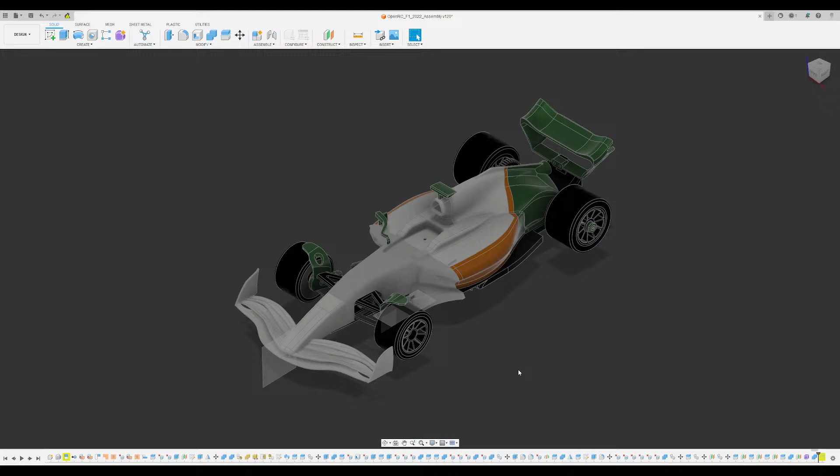But yeah, the main reason I started this channel was for this project, the F1 2022 cars coming out. One weekend in 2020, I was bored and I thought I'd just start this and see how it goes. And that kind of got out of hand really quickly. It's now been 4.5 years later, and I think I've gotten to a point where I'm almost ready for releasing it.

It's not perfect. There's still a lot of things I would have liked to do, but again, my life changed quite a lot since I started this. Back then I was kind of just looking around, seeing what I could do. And now I've got pretty serious commitments. Yeah.

But anyway, let me just go over what the design process looks like. If you watched the videos by any chance, there wasn't a lot there. It was just going through the front wing and wheel design, and you'll notice that the front wing is completely different on this car. So basically every part of this I've had to sit down and rework, and you'll see.

My original concept for this was just keep the core of the car, keep the printed body. It looks good enough, and this motor cover as well, and just print some new aerodynamic parts, new front wing, rear wing, and floor, and new tires. And that was supposed to be it. But the more I got into it, the more my obsession for everything being right took over.

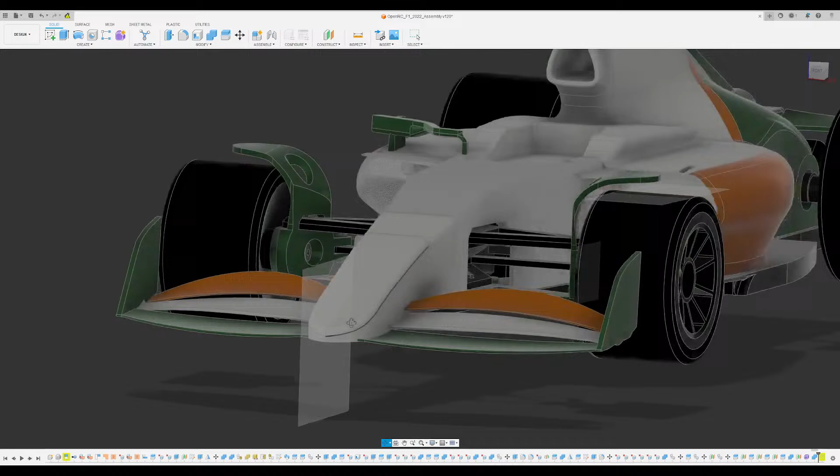This is also a full redesign of the front wing, basically from completely new elements. Made it much more simple, much more accurate to the real thing, where the wing starts from the root, goes up, and then merges with the tip, with the end plates. The bottom part's also a little curved, so I wanted to get some amount of the aerodynamics right.

So that was the original concept, and then I thought, if I had to make a wider wing anyway, I made something based on the RB19 with more realistic elements. The end plates lack a bit of detail, but that's mostly just for printability. You'll also notice that they look kind of thick in the design, but in reality they're really, really thin. Even now, it's just barely doable. I might even thicken those up a bit more before release.

My traditional method of strengthening prints like this is to have fillets, but this design has gotten so complicated that it's impossible to fillet these without some error popping up. So yeah, just Autodesk Fusion doing Autodesk Fusion things, but also kind of my bad for going too aggressively with the design. There were a couple of mistakes.

That's another thing. So you'll notice that this is an assembly. Basically, the idea was to modify the open source OpenRC F1 assembly that Daniel Noree had uploaded on his website. I thought that would be an easier method of getting all the dimensions right and not having to worry about designing parts separately and then struggling with the dimensions. But in hindsight, I would not do this. I would actually just build up separate parts, put them together in an assembly and fix the dimensions in the separate parts, because it avoids a lot of complexity with everything being in one file. It just sort of breaks Fusion a bit.

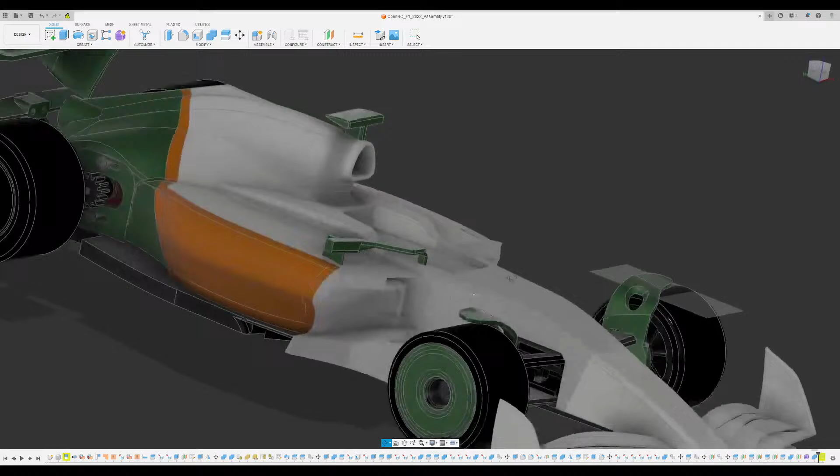And you'll notice also that the front is all a mesh, because it's all these triangles. I had to convert it to a mesh because when I was working on it, I had to split it up. And that's something I'll come to. But basically, I couldn't put it back together. The combine just refused to work. So in the end, I just turned it into a mesh and then combined it, and it somehow worked. It prints fine. You'll notice there's a lot of little jagged details. Those don't really show up in the prints, as far as I can tell.

So front wing full redesign. The tires also got a bit of a redesign. It's mostly cosmetic, but the covered wheels, I made them solid because it seemed like a lighter design than actually printing spokes. The spokes are stronger, but they're much heavier, and I don't think it's really necessary. Although I haven't really tested any of this. That's another thing I wanted to do: get actual electronics, build up a working car and test it. But my experience with LiPo batteries has scared the shit out of me, to put it mildly. So I won't be doing that again in a hurry.

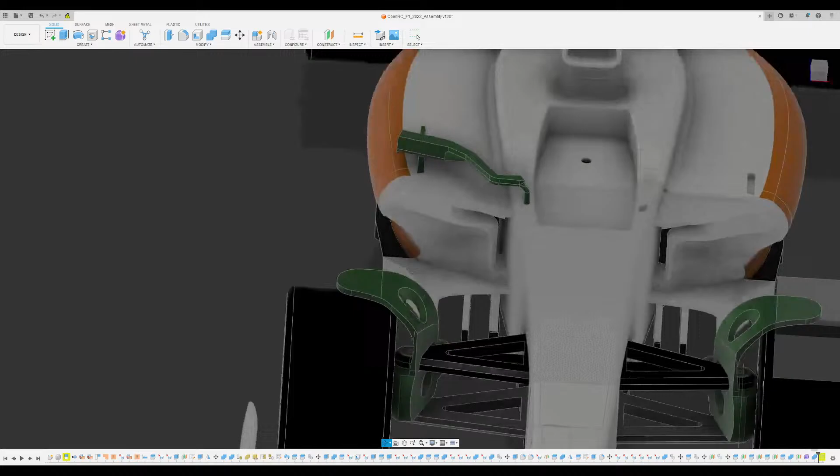So you'll notice these wheel covers. I did design these and I thought they were pretty good, but on comparison, they're not that great. They're a very poor replica. So I'm thinking of redesigning these whenever I get some time. Actually, I was planning to do it now, but I'm not so sure anymore. Just getting the live stream up took me a bit of time.

Also, the front was redesigned. The floor is fully redesigned. The front tray fits in a somewhat different way to the original, and you can see I've tried to replicate the aerodynamics as close as I can while keeping the original M3 bolts in the same spots, or as close as possible. The suspension and chassis are more or less the same, same drivetrain. The idea was to keep the electronics the same, so if anyone's got the existing one, they can switch over without having to buy any expensive new ESCs or motors. And I've kept the side pods the same.

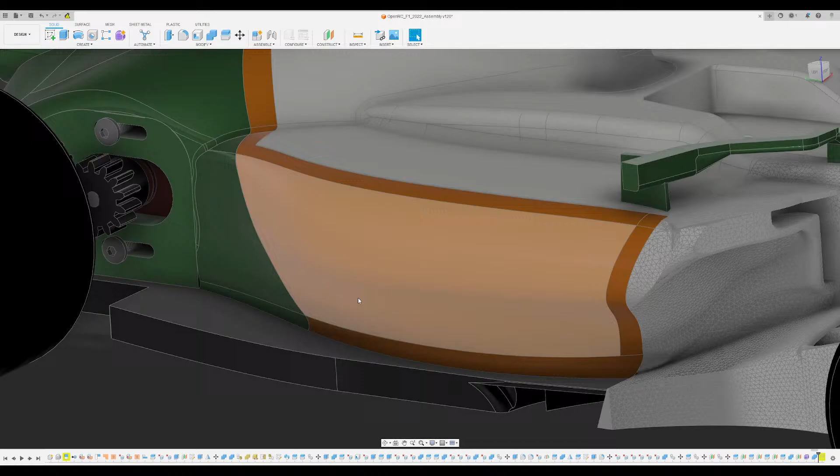This is not for lack of effort. I tried very hard to create a more representative side pod for the new 2022 regulations, back when I started, and you can tell that failed dismally. I really wanted to do a Ferrari style side pod from the 2022 car, with the bathtub style things, but that didn't really pan out. So I'll probably release it with these, but I have been working on an alternate concept with more of an undercut after seeing the 2024 cars.

So this is undercut, a small amount of downwash. The hope was you'd combine the two airflows and push them in. But really, with all the spinning gears, the rear corner is pretty fucked no matter what you do aerodynamically at the front. This is more of a cosmetic job. The aerodynamics are functional, but at the end of the day, it's not really going to matter too much, I think.

Yeah, so for the new ones, I also have to redesign the front. I haven't really thought of tackling that yet. That's if I have time. I have the enthusiasm, but I do not have any energy left for this by the time I'm done with work and sort of my other stuff, life stuff.

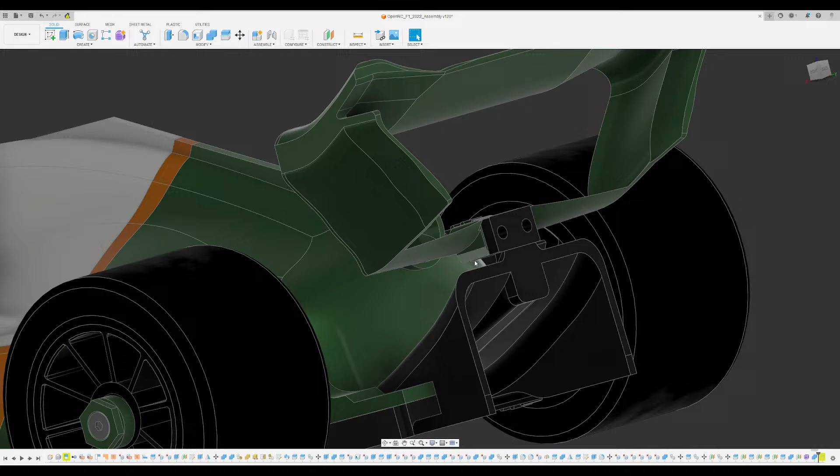And yeah, floor, I think I went over it. Diffuser, everything is kind of built. The rear wing, this is also kind of a bit of a project, really. So I went through a couple of iterations. This is, I think, the fourth iteration of the rear wing as a base concept. So it's getting it to sort of fit correctly. I had made a mistake where it was actually behind the diffuser at one point, and then I looked at the cars a little closer and realized they should actually be ahead.

So yeah, did that. Got that working, and this is based on a wing that Mercedes had brought to Monza in 2022, I believe. So it's a low drag one. The thinking was that for this car, at the speed it's going to be running at, drag is going to be much more of a problem than downforce. So I can trade off some downforce if it reduces drag.

And I also tried including the split end plates from most 2024 cars. So yeah, I've been trying to implement things as I see them in F1, but it's just very limited by time. Yeah, I think that's pretty much whatever I've done. So yeah, anyway, I want to try and wrap this up soon. It's been sitting on my mind for a long time.

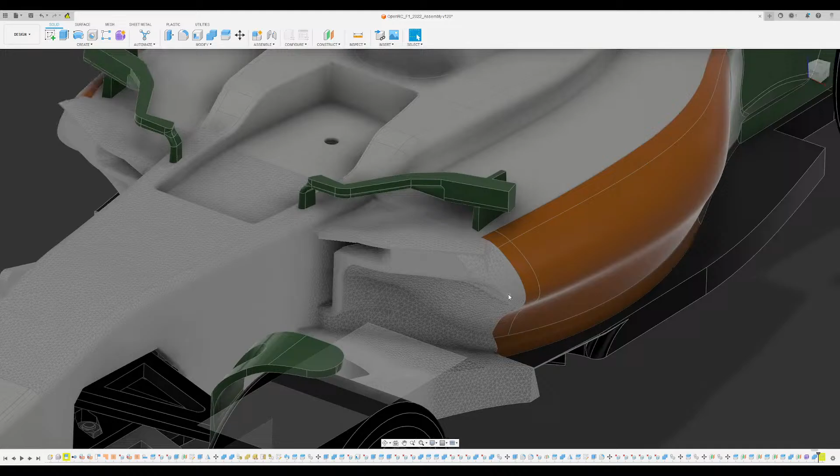Oh, also, new mirrors. So one of the problems I faced with the new floor was that the way the sidepod lid of the car attaches to the floor is gone. Basically, that used to be like a barge board type of thing, and now that barge board is replaced. So instead, I figured a cheap and easy way to get around that is to just make the mirrors. The original ones had the mirrors here and then the attachment points here, but instead I just combined the two.

It's a nice idea on paper, but I think in reality it's a bit more complicated. Just getting these parts to print is a bit tricky. Yeah, I mean, this project really isn't perfect, but I just want to get this done with, to be honest, at this point. I figured that at least releasing something is better than nothing. And yeah, I'll see how much time I have left for refinement.

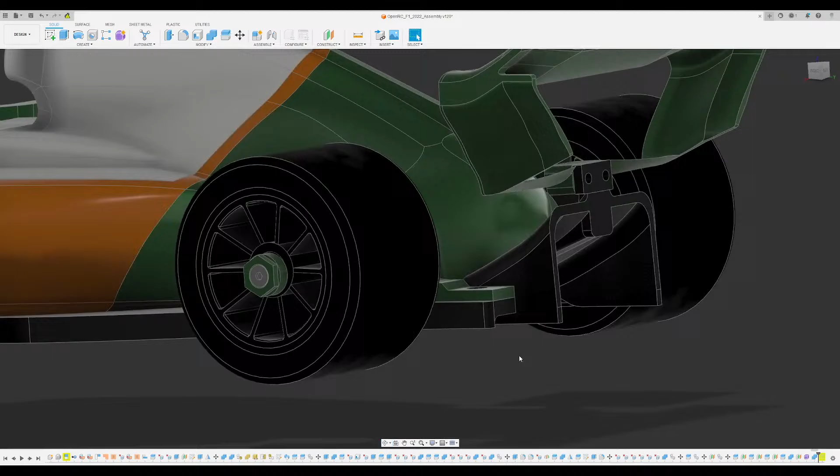And yeah, so that's basically it. The motor cover is also subtly different. You can see it with the diffuser. The diffuser kick comes up right behind the motor, so unfortunately the motor cover needs a cutout. That's something I'm thinking of maybe redesigning, but at this point, I don't know. It's probably just enough. So that's sort of the thought process that kicked off the design of the new sidepods.

The motor cover is going to be replaced anyway, so why not just go all in and redesign it fully to better match the regulations. But again, time's a real constraint. Yeah. Other than that, it's fine. I've printed it. I've done some test fits. Of course, I haven't done any running tests because I don't want to fuck around with LiPo batteries.

But I don't know if I'm allowed to swear that much on stream, but whatever. Yeah.

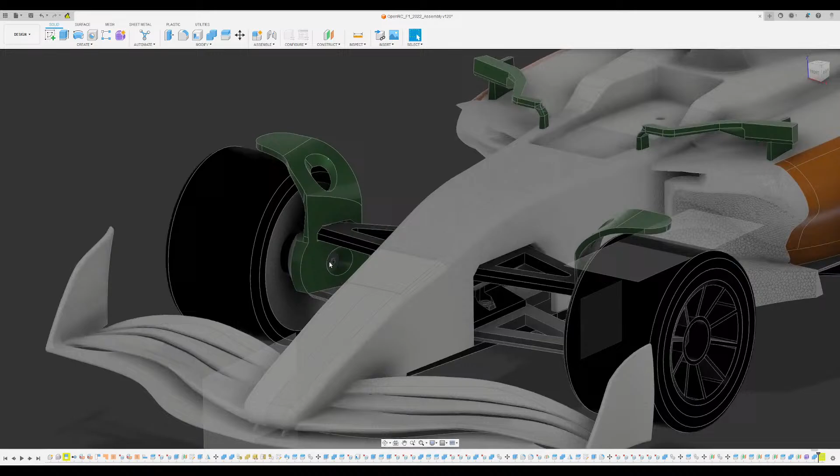Everything fits. So let's see. I'm gonna try and work out how do I build this. So really the last part left, I guess, is the wheel brows. So let's do that. Right, left. I had started work on it somewhere. I need to just find it. Oh yeah. 7 to 8. Yeah.

So I started work on a more full wheel brow, deflecting it off to the side like the actual car. The idea here is to split it into two parts and have this screw be the common mounting point for both. Yeah. So if I remove wheel brows and look at this part in isolation,

so yeah. Anyway, I'm gonna try and figure out how to do this design. I'm probably gonna be live until 12 p.m., so about 40 minutes or so. So I'm gonna try and do this.

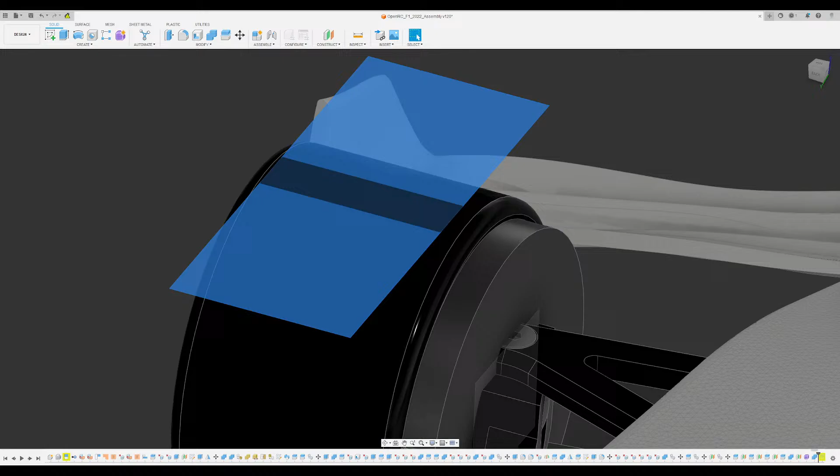All right. So first things first, let's construct this bit, the part that's supposed to go over the wheel. Let me look at some reference images. Okay, so this is the standard part, so it should be fairly easy to replicate. Let's see. I'm gonna give it about, let's see, how about 1 centimeter? I think that's gonna be way too much, but

front. Yeah, that's way too much. 2 millimeters. It's cutting it close. Any sort of movement might scrape against it. 3 millimeters seems about right.

So let's do, right, hold on. Inspect this, 5.6 centimeters. Okay, 2.6 now, 2.63. So yeah, is that really the midpoint? Doesn't look like it. Oh well, gonna do about 1 centimeter, seems about right. So what I'm gonna do is do 160, so about a 20-degree sweep,

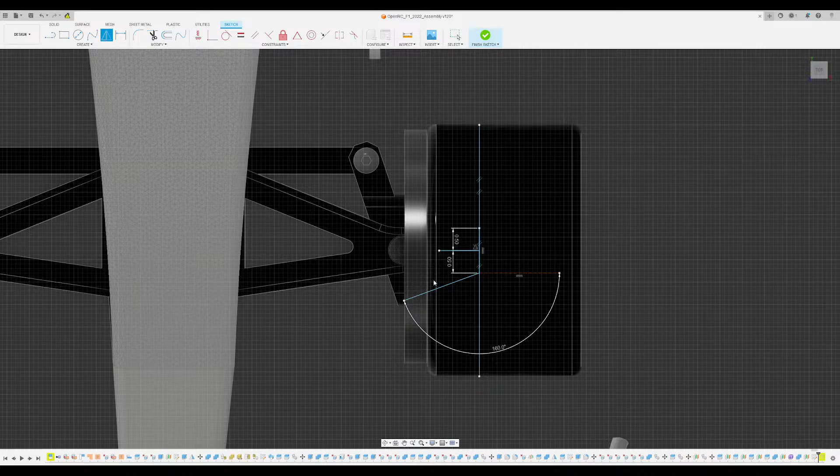this looks okay. Let's try extruding and see how it looks. 2 millimeters. It's a bit high. I mean, if I were to do this realistically, oh, hold on. Oh, yeah, I think Fusion's just trying to compute whether it's colliding or not. It's slowing down a bit.

Yeah, realistically, if I were to do this, this is I think too close, because any bumps will cause the wheel to scrape against it. That's not ideal. So instead, let me start as an offset. Minus, not where it's supposed to go, so minus point.

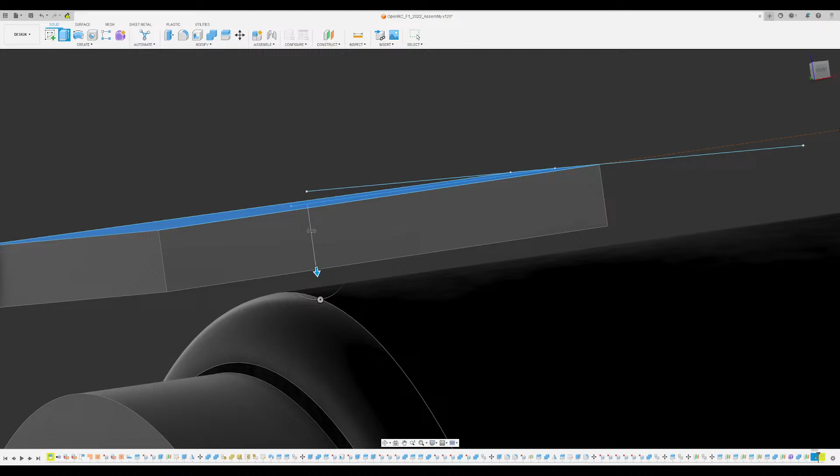I can't really see the extrude windows, I think. Yeah, you can't see it on the stream. That's unfortunate, because I liked it to be there. So 0.1, distance of 0.2. So that should be okay. Yeah, that kind of looks fine.

Now, split body. Actually, hold on. I don't need to split the body. I just need to split this face. So I want to create a connection between that part and the circular part below. So hide this wheel. Yeah. So now this is the splitting tool. Extend it. All right. And now, actually, hold on. Extrude this.

And with a taper angle, let's say 5 degrees. Tapers in 3 dimensions, though, that's not ideal. That's okay, I can just cut it anyway. Let's try 10. I want to basically get to a point where it looks about right. 15.

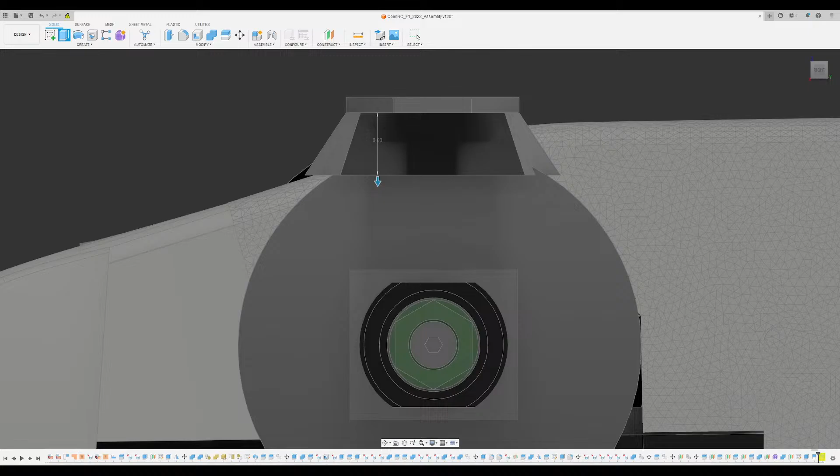My Fusion minimized again. GG's. Right. So this part, I think. What if I just delete this face? Just deletes the whole thing. Okay, cool. Thank you, Fusion. Very cool. So let's do another split face. Split this face. This, extend it. Okay, that should split the face. Extrude this all the way back. Yeah, so that's a decent cut.

By the way, if this looks chunky, I'm gonna clean this up. I'm gonna do fillets and stuff, so don't worry about it too much. So extrude all the way up here. Yeah, so that should be one clean surface, hopefully. Of course, it's two because Fusion. Anyway, that leaves us with this, so we can extrude this down.

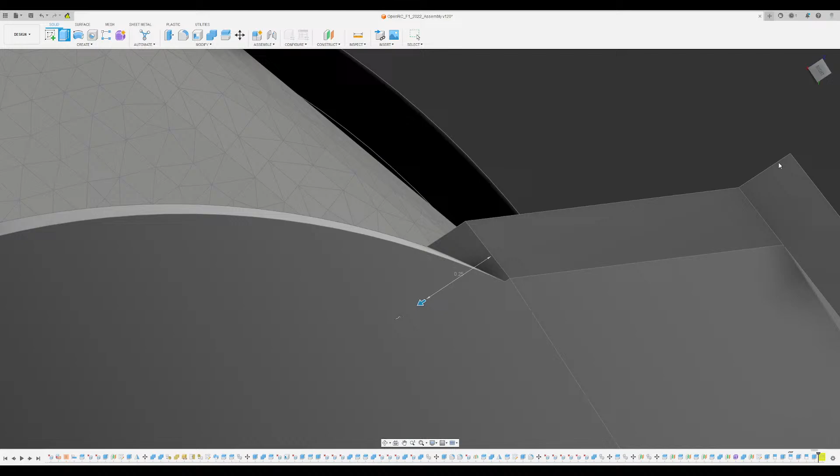So, odd. There's a 25-degree diagram. 25 might be too much. Oh, that's weird. Well, it does seem to match. What happens if I make it 0 again? So yeah, it goes straight down. Okay, interesting. So I need to give it the same taper as the original extrusion, but okay, whatever.

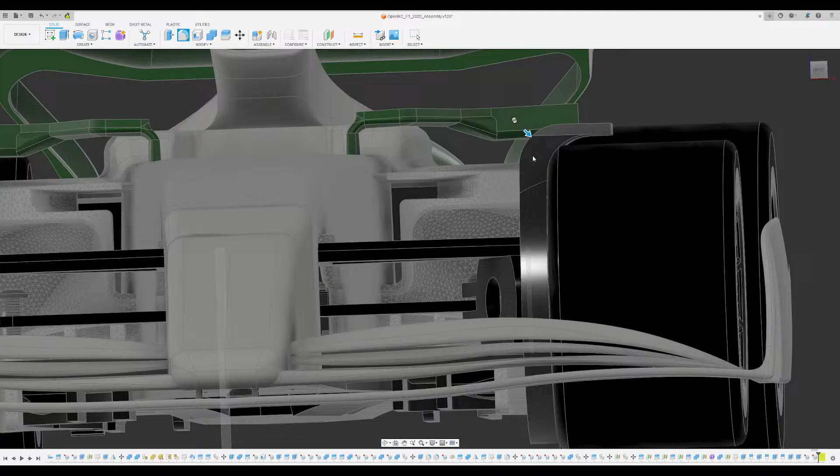So this should be a bit easier. All I have to do is hit delete. Yeah, there it goes. Hit delete. There that goes. Yeah, it's a cleaner join. It's not perfect. I don't like it. Oh well, we move. So let's fillet both of these. I think that looks good. Let's get the slick and see how it looks. Ooh, that's very chunky. And so hold on.

So let's fillet this first. So this shouldn't need nearly as much of a fillet. Get in here. All right. Okay, so this can do with the small end. Okay, so then Control C, Control C. So the first thing is fillet this to 0.4. Should be good. Then we fillet this. Filet mignon. Right. Awesome. So that should be good.

Then we can fillet these edges as well. Actually, I can just fillet this whole rectangle, I think. Nah, that's not gonna work. So let's do this instead. Okay, that looks decent. Alright. Comparing that to the original, yeah, it's already looking a lot better.

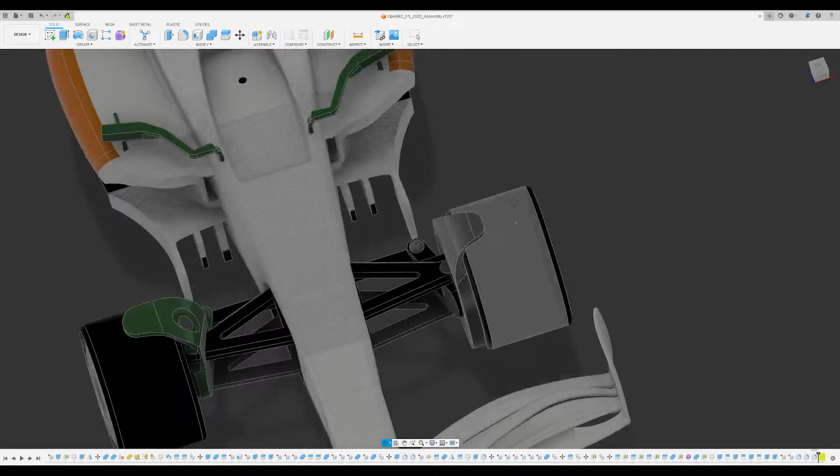Okay, so now I need, oh, actually, before I do any of the fillets, I should probably Control C these fillets. I just realized that the clearance between this face and the wheel is a bit too small. So that might be what's causing the issues, come to think of it. Oh, I had extrude instead of fillet. Fillet instead of extrude, my mistake.

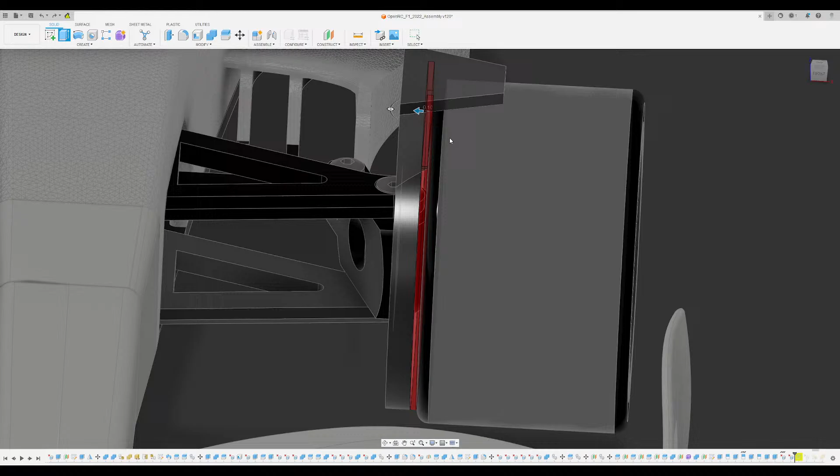Oop. Okay, my Fusion just all tapped out for some reason. It's been doing that a bit. Okay, let's delete that. And of course it causes an error. How about this? So yeah, that's another thing with this project. It's a bit of roulette. You don't really know which faces will get deleted and which won't. But face deletion is the cleanest way of getting rid of these weird artifacts.

Yeah. And okay, so now let's try filleting this. How close can we go? I still want to do 0.4. I think the tire is filleted to 0.3, so let's keep it at 0.3. Fillet this.

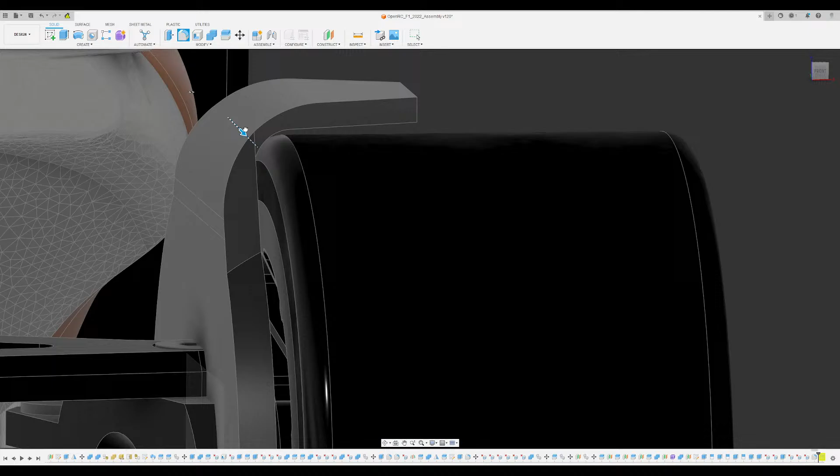0.7. Oh, another thing to remember, this is more of a self note, is that even though it looks thick in the design, the actual printed part is going to be super, super thin because we're zooming in that much. So I'm gonna keep that because otherwise it's gonna be flimsy as hell when I print it. And that might be too much. That seems about right. So yeah, that seems okay. Let me just check once with the reference images. This may be a touch too big. No, it should be fine.

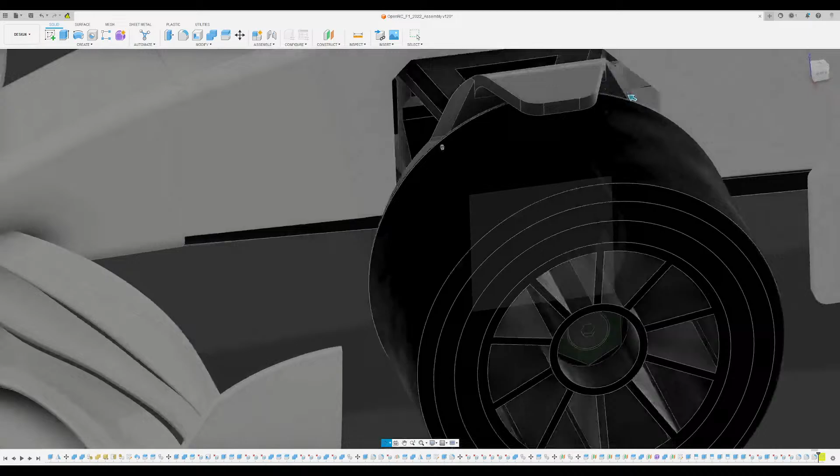Okay, now I need to fix these edges. They're a bit too sharp. So the best way I can think of is filleting them out. So yeah, that should fix some of the smoothness issues. Bingo. Now, these edges. Yeah, that seems about right. Bingo, bango, bongo. Let's go. Yeah. Perfect. So now we've got a decent top face. It's time to work on the bottom.

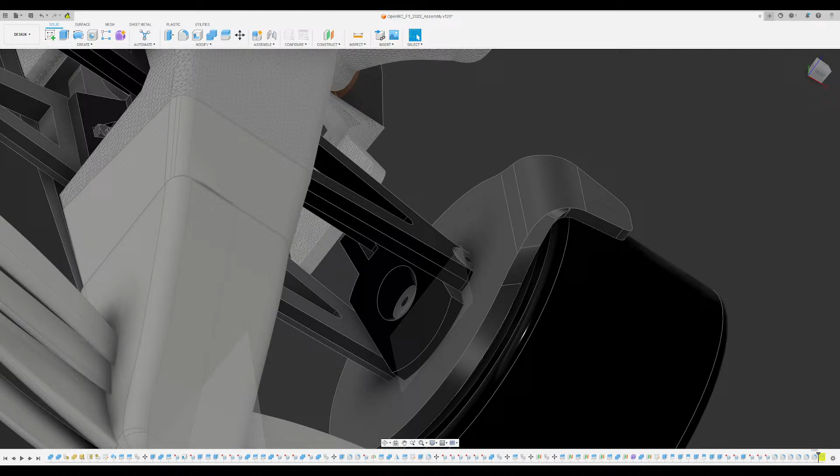Oh, there it is. Okay, so it's mostly circular, but at the bottom, it's got this sort of vane. Can I model that? I think I can model that. The question is, does the fairing continue? I don't think the fairing continues past that though. So let's, actually hold on. I need to block out most of the body. So let's get the front nose, front wing, and the chassis assembly out of the way.

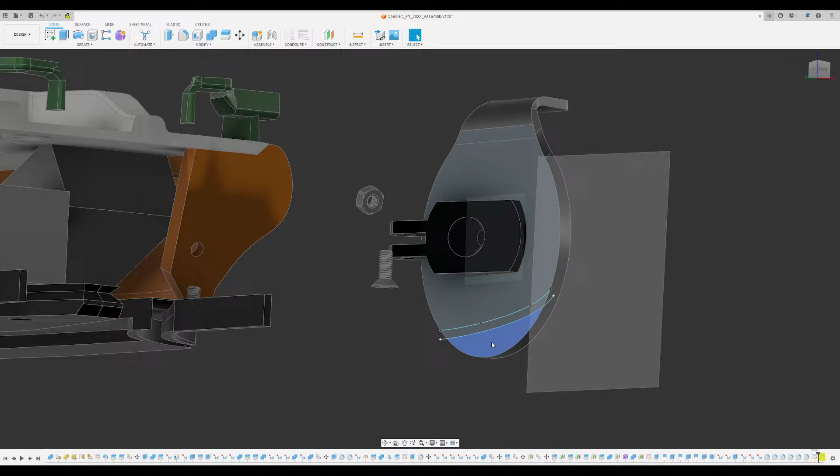Let's create a sketch. So anything else on the way? Oh yeah, the front. It's like front trim cover and the front tray. This out. Create a fit point spline. Finish that. Offset this -0.2. -0.2. There we go. So that should give you a nice isolated area. All right. So now extrude this. Does that look about right? Okay, I think we're gonna need another sketch in a perpendicular plane. So let's get a

You won. Sorry, cat got in the way. What? Okay, I'm gonna take a minute. Bye. Be right back.

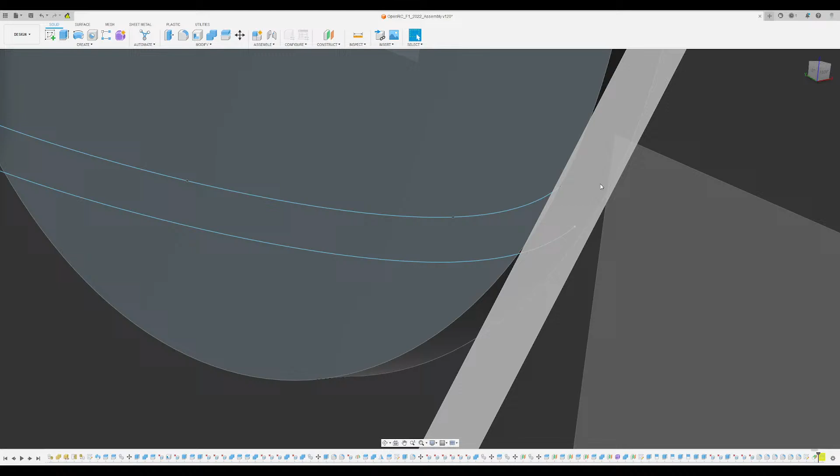So now let's create the second dimension.

Now from here... what? I'm giving you scratches, dude. I'm sacrificing a hand on the stream for this. Why are you giving me looks? Okay, so that should be good.

Let's copy and make this a bit nicer. Sketch, and now let's create a sweep. Point being, select the spot. Ooh, what the hell, that causes some interesting errors.

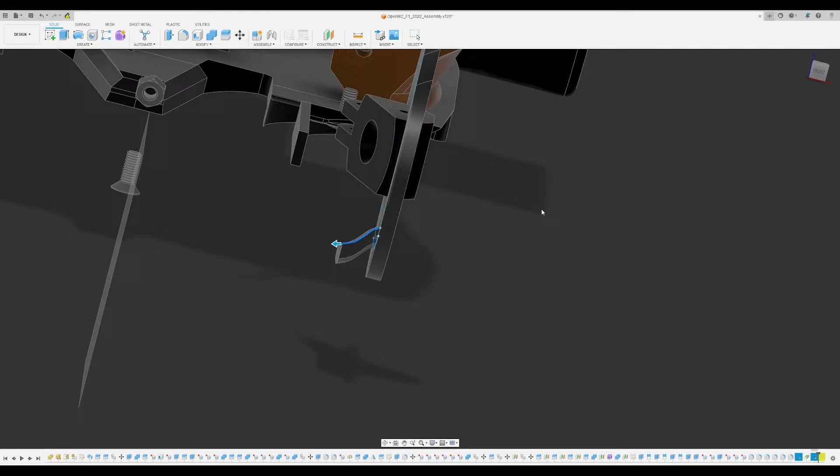Body, how about join? Why do you intersect itself? How about... there we go. Something, what's up with that. So yeah, that's decent, I think. Okay, now got that.

I can delete this, I think. Yeah, look at that. Unfortunately it's in 2 dimensions, so there's no one spot I can print, I have to put this together. As a compromise I can probably just cut this at the bottom and make the bottom one part and the top the rest of it. Okay let's do that actually.

Split this. The splitting tool is going to be 1. So for now I'm gonna split both. I'm gonna figure out exactly how I'm gonna do this in a bit, but yeah.

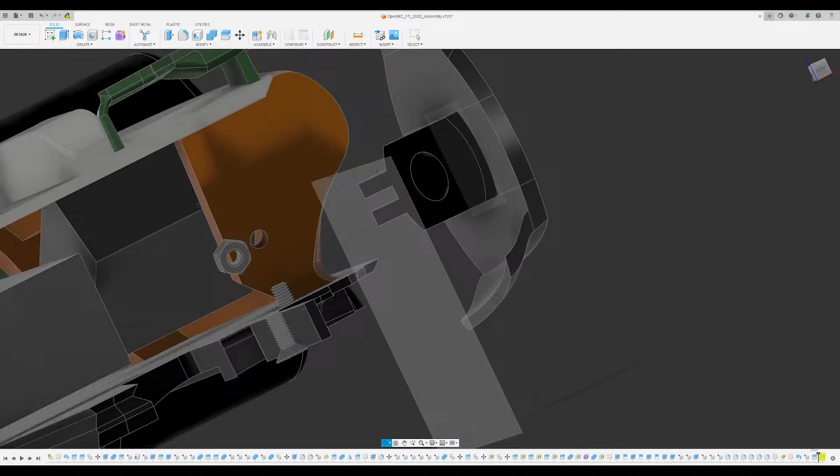Let's see, something seems off here. Let's try a press pull. Can I pull this face forward? That... what if I let's do automatic.

Okay, that looks a damn bit better. So let's compare that to the old wheelbrow. That's a massive improvement.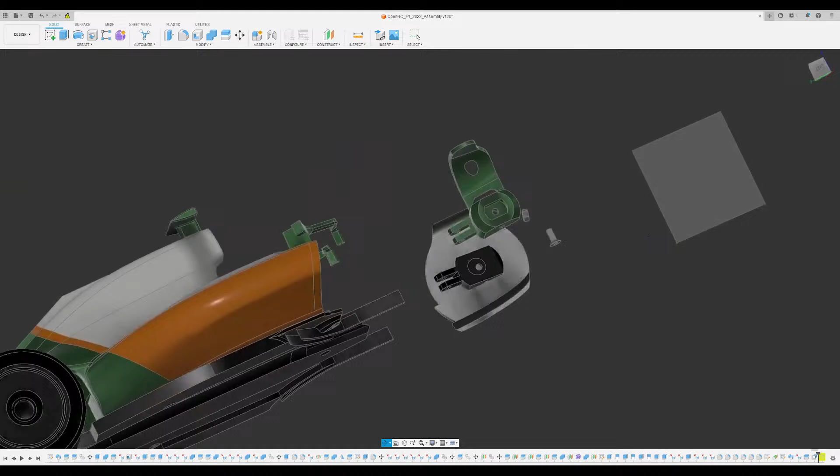Oh, I think something is up with the rotation. Okay, dude, chill.

So that might be a problem, it's kind of cutting through. Yeah, I should probably, actually yeah, let's do that.

Tool body is this, let's keep the tool, cut it. That should result in a new body popping up here sometime soon. Actually, maybe even a couple of new bodies popping up. And oh yeah, Fusion of course minimizes on me. GG's.

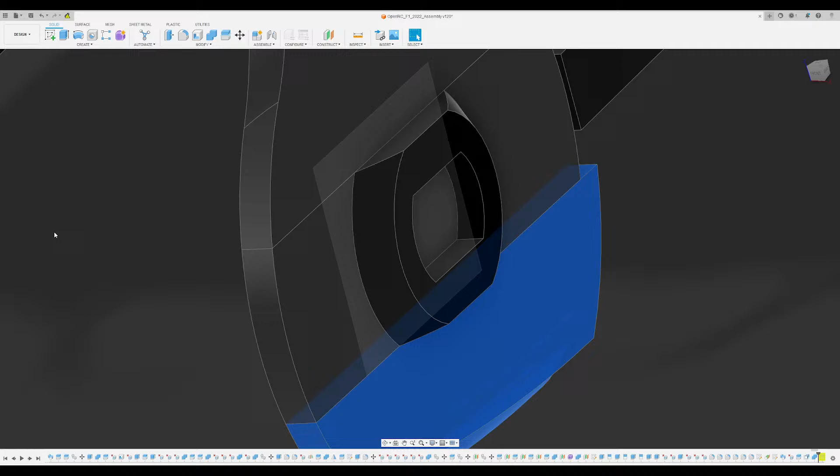Combine 3, 5, and 6. Yeah, 4, 5, and 6, and 4. So that should be pretty easy. Print the... I don't like making it a 2-part, but what the hell, it's a pretty complex bit of part anyway.

What else was I thinking? So will this fit? Good question. Let's move 7 to 7, see how this works. Yeah, so this will sort of slot in.

When I print this I'm thinking, how will this sit on the actual suspension part? There's actually like it's a bit of a press fit, that's not going to be ideal. So let's press pull these back a bit.

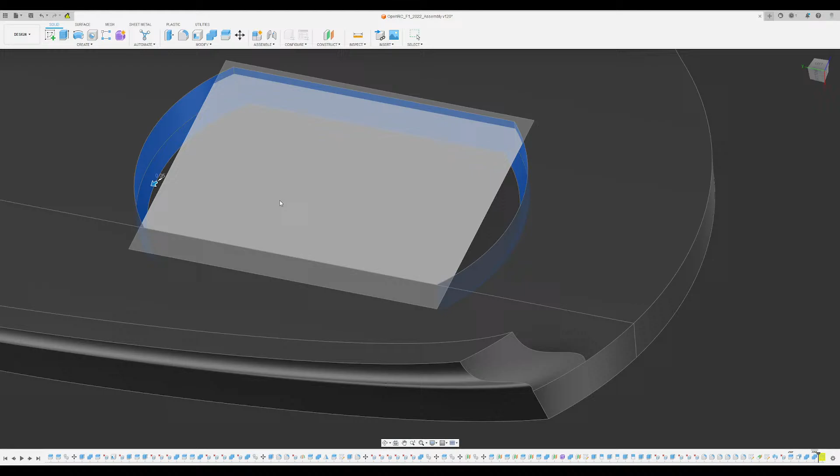Yeah, so give it a little, that's half a millimeter. Let's get 0.025, not too much, but just enough so that it, printer clear, accounting for printer clearances and all that. Anyway...

Oh god, the rotation on this kills me every time. Actually, I need to do that. Let's get 7 to 7 back in. This, got, keep, okay, bingo bingo. Let's remove 7 to 7. Did that affect it in any way? I don't think it did.

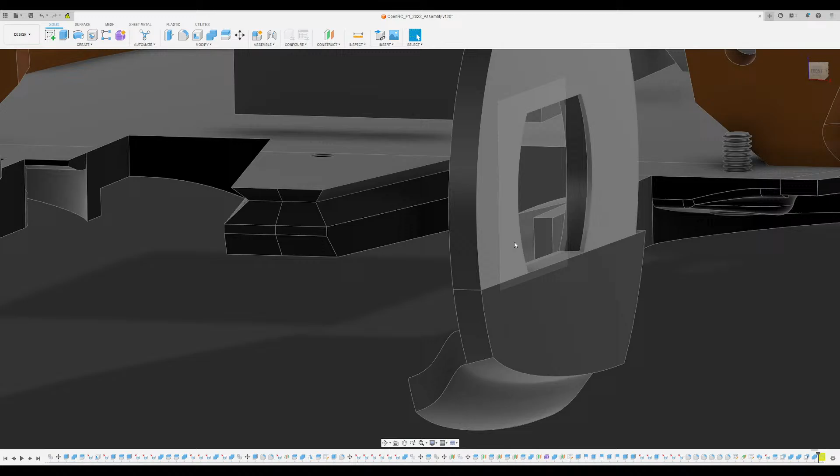Yeah, most of the attachment is going to be to the upper brow, so the lower brow has like 1 point of attachment. That's suboptimal. Can I do a dovetail and just slot these two together? Would that work? So the primary axis is going to be vertical, so I can probably do a dovetail joint.

To 120, based on absolutely nothing at all. 0.6 seems okay, so this should be 60 then.

Yeah, so inspect 1, yeah, they're exactly the same length. And let's create a mirror line.

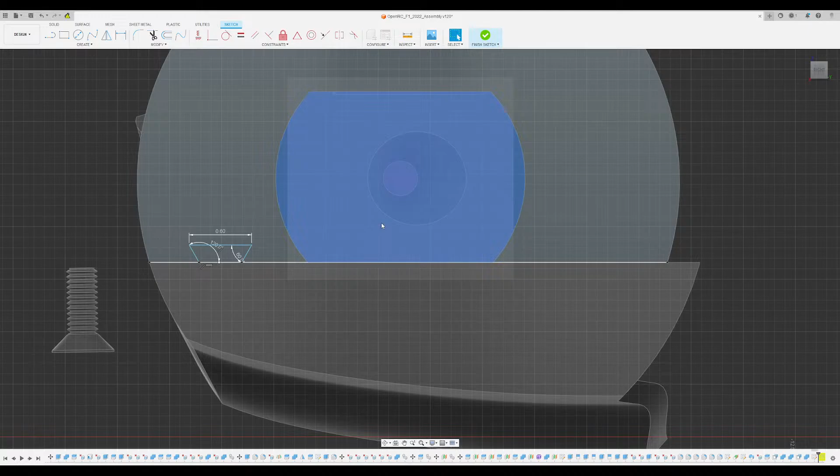So this is the midpoint. Hold on, that shouldn't be the mirror line. The mirror line should be, no... and line, because it's for the whole wheelbrow. I think that's the correct mirror. I sure hope it is. Anyway...

Yeah, that should be good, we have 2 dovetail joints. So basically, when gravity pulls it down, sort of the dovetail joint resists the whole thing.

Control and click with one hand is an interesting experience. Shoot, and back here, so create a new body, and you'll see why in a moment. Now combine 1, 2, and 3, and then combine 1, 2, and 3, and join them. Don't keep the tools. Perfect, so that should be 1 point of attachment.

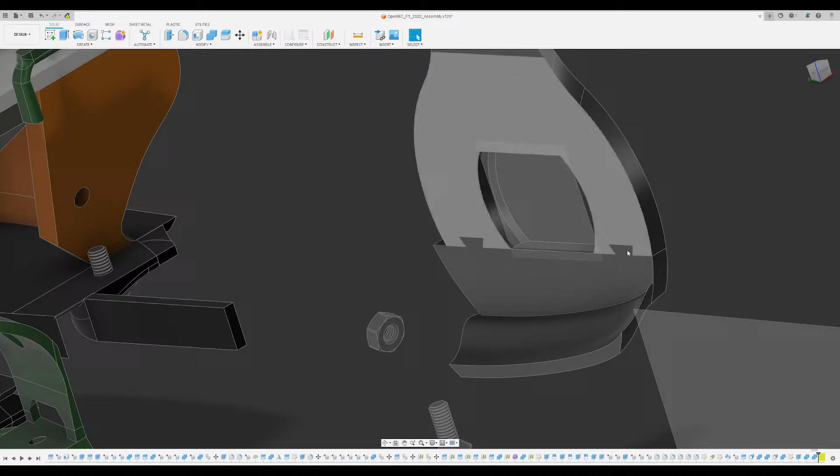If that doesn't work, sorry, so if that doesn't work, I'm gonna add an additional screw slot at the bottom just so this sits in perfectly. Actually, I might do it anyway, because fuck it, why not. It's good to have a little bit of redundancy, I think.

And the original design does, on that note, yeah, the original design does require it, because, so combine this with this, cut, keep tools, done.

Combine this. This doesn't really intersect with the lower wishbone, so it should be fine. So now when we hide the chassis assembly and look at this in isolation, I can delete this, can delete this. Hope that doesn't break anything.

Like Kerbal Space Program has a Kraken, and Space Engineers has Clang, I think Fusion 360 should have a similar god of physics that you pray to every time you delete a face. Like, praise the gods. Make sure this fucking works.

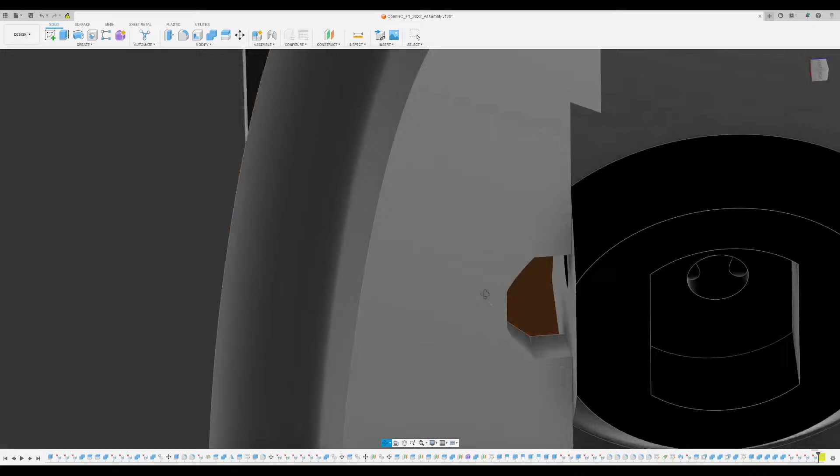What the fuck? Genuinely, this is completely bugged out now. Okay, let's try deleting these faces. Maybe that's what's causing the issue. So 1, 2, 3, 4, and a 5. Huh? It's still giving the same thing.

All right, so 0.025 is sort of the consensus, right? 0.475, let's keep it consistent. Okay, so now when I get the chassis assembly in, it should be smaller. No, it's actually worse. Hold on.

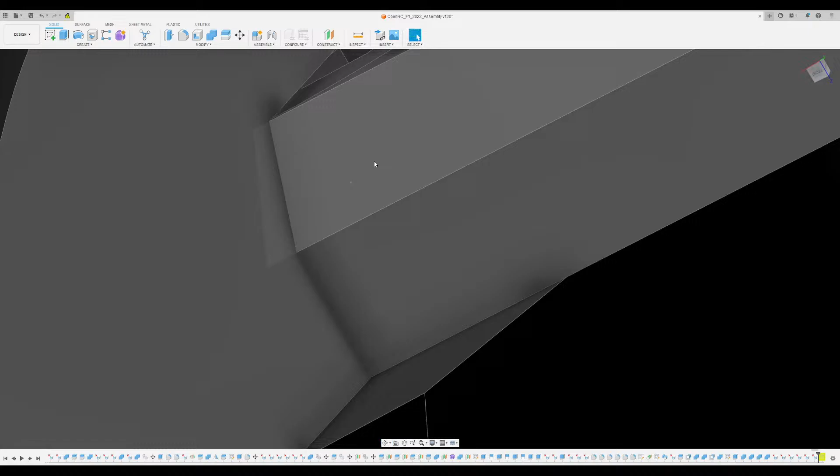How did the assembly fit earlier? It's just supposed to make a cut, and it really hasn't. Only just fitting now.

Okay, maybe I do need to account for that a little more. What? What?

Okay, let's do this again, I think. Yeah, hold on, I think I need to take another little break for a minute. This guy's acting weird.

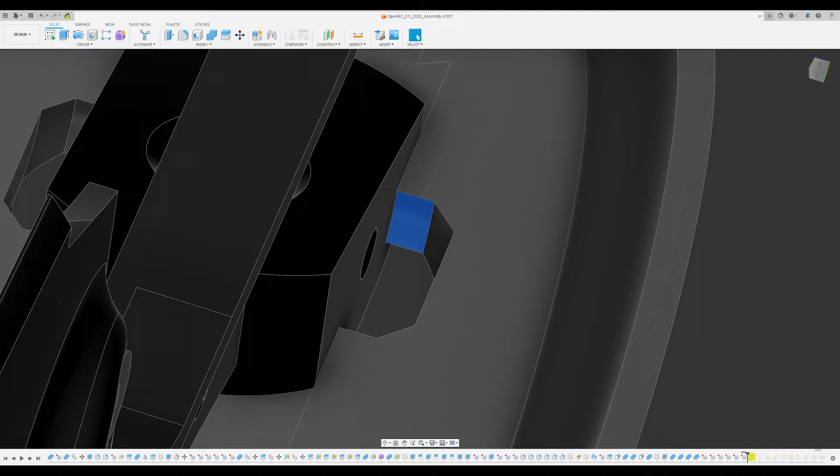All right, where was I? Click, click, click.

Press pull. Okay, 0.525. Okay, so 0.45. Let's try this and bring back the chassis assembly.

That's really confusing. Just cut, right?

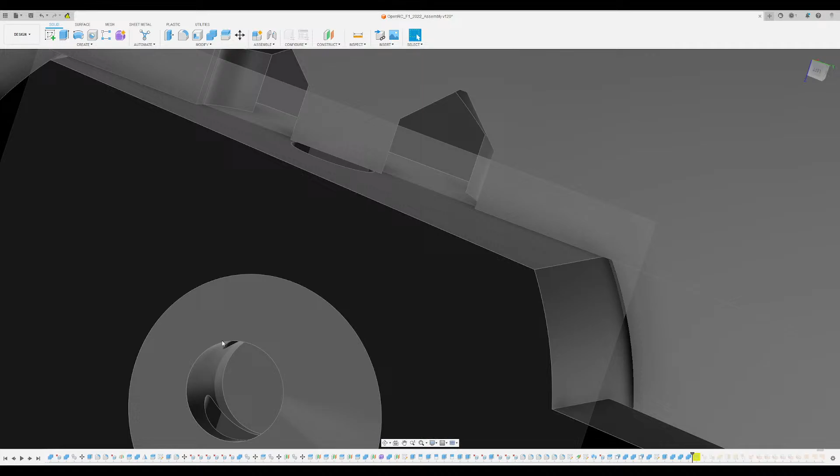I see what the problem might be. Okay, let's see, bring that back. So the tool bodies, also select this. Now let's see what happens when I hide the chassis assembly. Yeah, there's also like a slight clearance between these, so that might... I sure hope this doesn't break anything.

So yeah, delete that, that, and that. This is junk. Just toss it in the junk drawer and delete those faces. Let's try and press pull one more time.

Now it stays. Bring back the chassis. Okay, I think that means it's deleting stuff. Okay, let's do this another way.

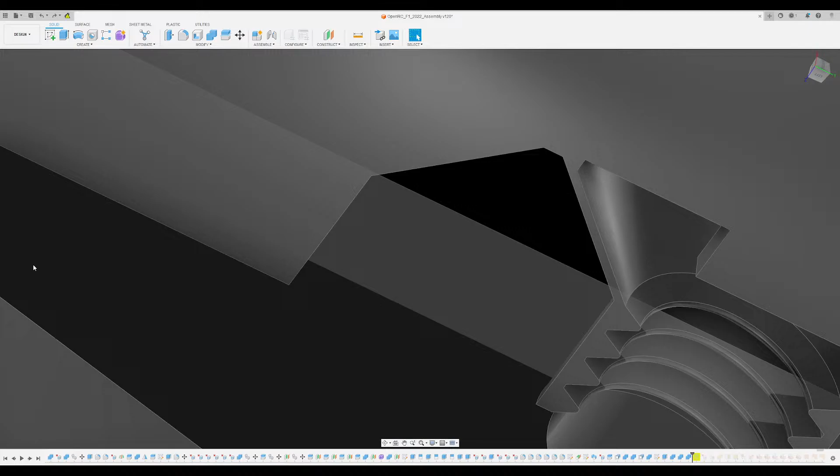So, huh? No, it's fine, it doesn't really change. I checked the camera angle for that reason. Okay, not entirely sure what's going on here.

Set this. Whoa. Oh. Oh, hey, on the bright side, we managed to get a screw hole in. RIP aerodynamics, though.

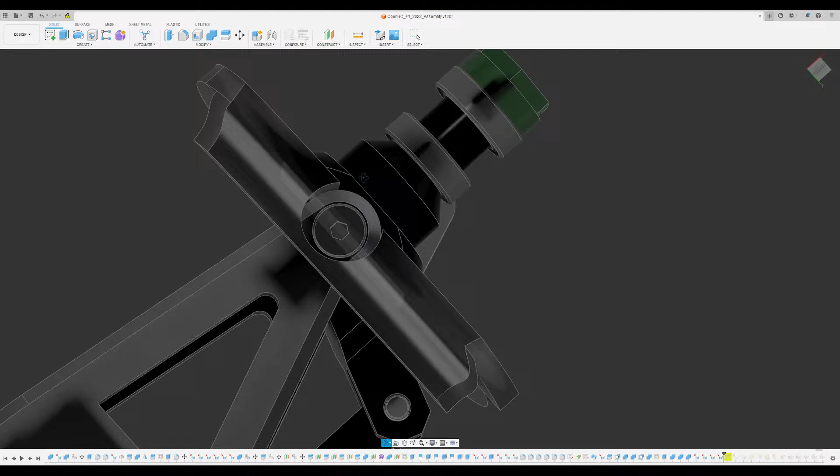Yeah, okay, let's do that for this part now. Let's try and remember the precise order in which I did the deletions.

So, yeah, let's get rid of the chassis assembly. Delete 1, delete 2. Okay, suboptimal.

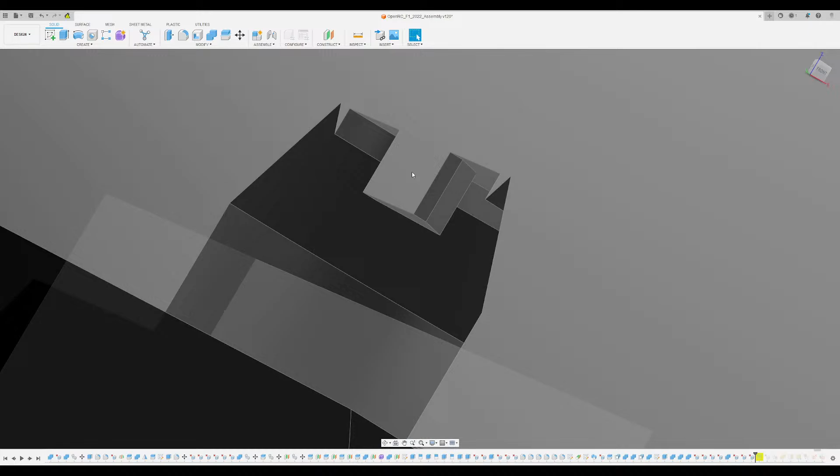Yeah, that works. Put this in the junk drawer. Yeah, I need to go to planes until we hide that. It's really getting in the way now.

What the? Didn't I? Okay. Delete that, can't delete that. Delete that, that works. Easy peasy lemon squeezy.

What do you mean I can't delete that? Yeah, this is basically a summary of how this project has felt. Split that using these two faces. Oh yeah, it's do not intersect, of course.

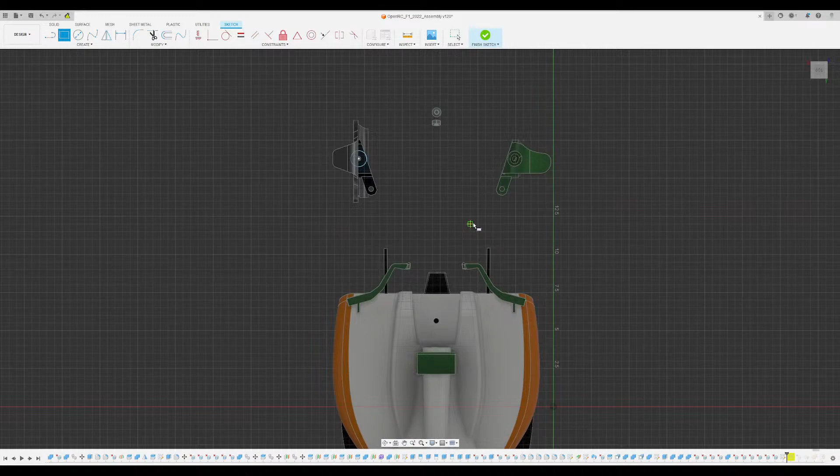So let's go for some big brain tactics now. All the way there, and also include that little bit in the center. So let's make this fully fucked. Yep.

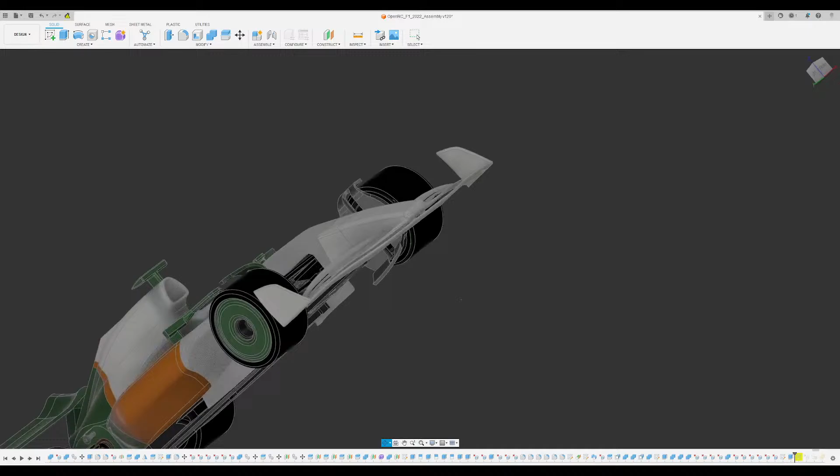Yeah, that's definitely a design, one of the designs of all time. And now...

So what I'm going to do here is basically shell this. I don't think shell is the right command. Hold on.

So basically, I want to create an attachment point, so recess this part a little bit, so that this can attach mechanically and be completely secured. Because right now it's not really attached to it at all, it's more of a press fit, and that's not optimal.

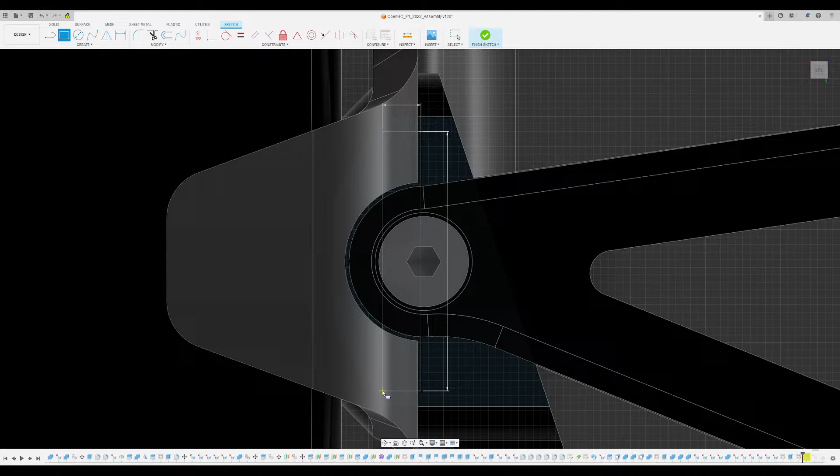Okay, let's create a rectangle. I want to say that I don't really care about perfect symmetry, but I keep getting proven wrong. And okay...

0.5, 0.75, angle of 0.2. So 15 by 4 millimeters, whenever Fusion decides to respond. 0.4 by 1.5 centimeters. 0.8. That should be about right.

So, finish sketch. We don't really need the chassis assembly for this part. 1, 2, 3, 4, 5, 6. Should have trimmed, but I really don't have the time.

Minus point, so about 2 millimeters should be good enough. And it's not cut, new body. Let's combine 1, 2, cut, keep tools. Combine 1, 2, combine, join, and don't keep tools.

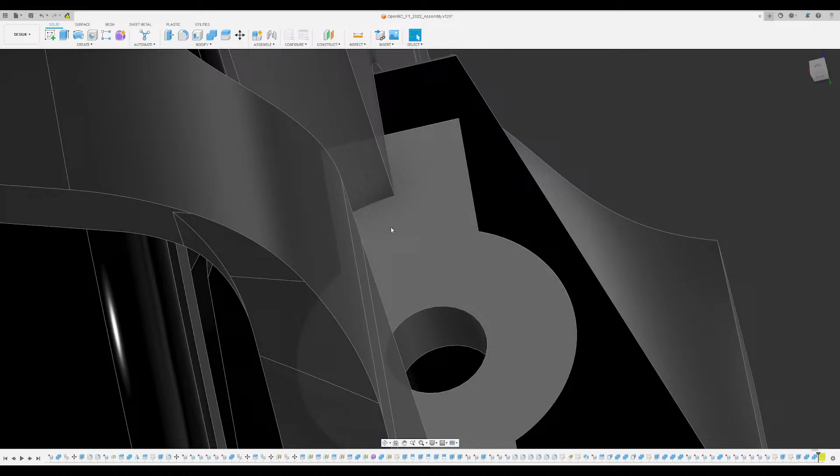Oh, it didn't join, the hell? This usually works. Okay, let's go back to the sketch and make a little modification.

And yeah, this time I'm actually going to trim stuff. Oh, oops, trimmed the wrong thing.

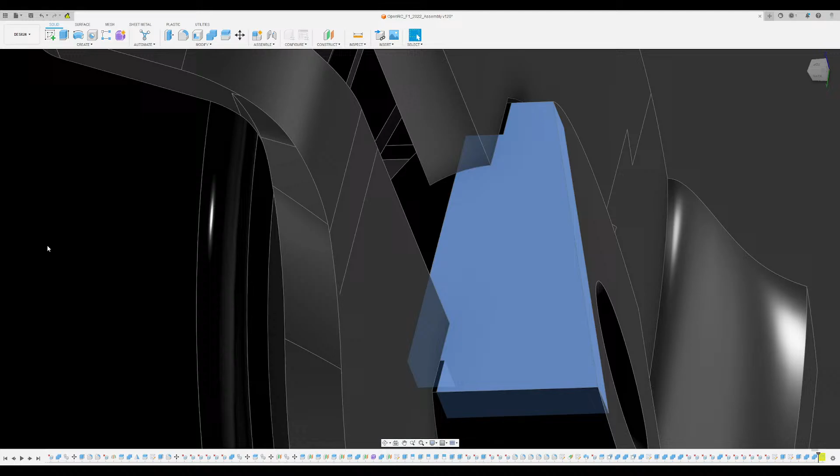Texture got fucked up, hold on. Get rid of that. 1, 2, and 3. Okay.

This still isn't coming. Oh. What?

Get the chassis assembly back again. Okay, that makes no sense. It's not, might have been the... Press pull. Okay, be right back.

Alright, split body. Let me get these tools out of the way so I can use these. Get these tools, okay. Split them.

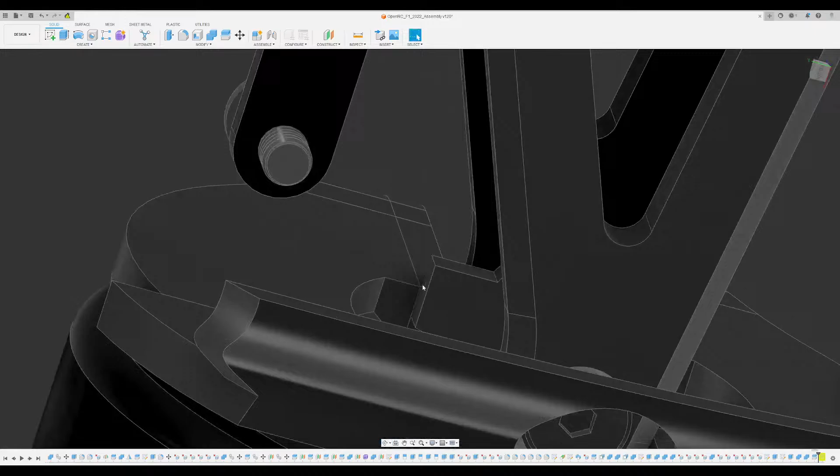Join it, so that should work. I should also probably extend these. So split body, use this. This goes into junk.

Okay, I need to make a circular cutout to make sure. Wait, I clicked construction by mistake. Hold on, sketches. Where's the latest one? 263. Sheesh, anyway.

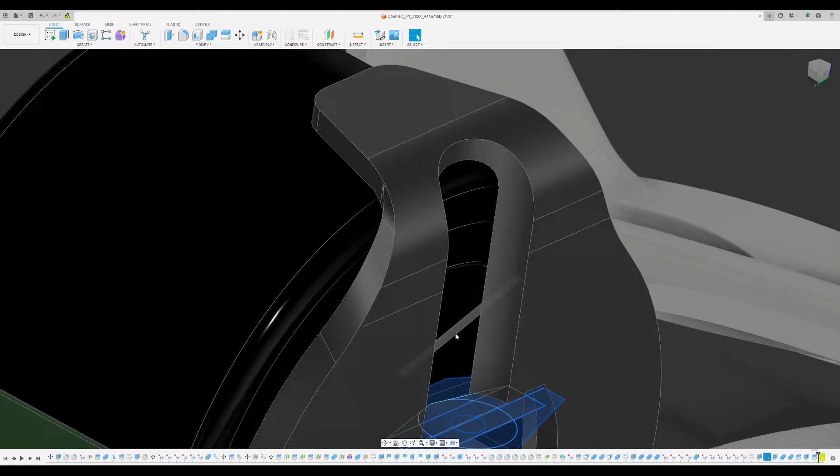Chassis assembly out. Make that visible, that'll be a nice start. Diameter is 0.3, so when you bring back the chassis, yeah. So the idea being...

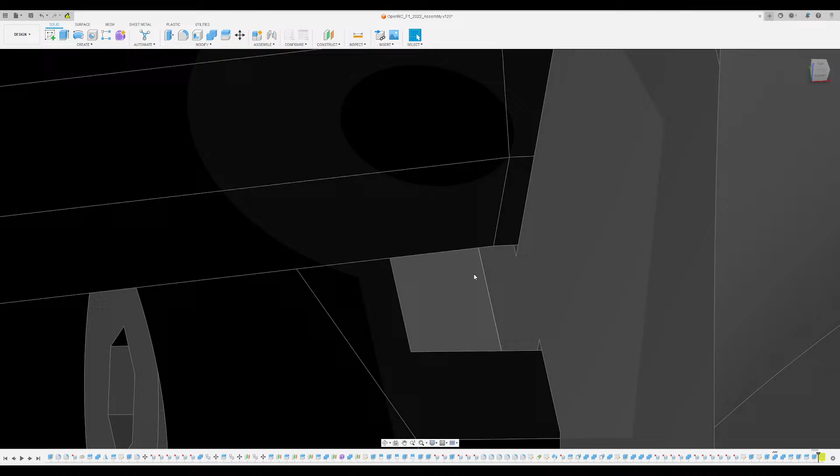The chassis assembly, yeah, so this is going to be screwing into the slot right here. And ideally the chassis, the top suspension arm, would just lock both of these in place. So yeah, I think that's more or less it. Now all I've got to do is mirror this whole design.

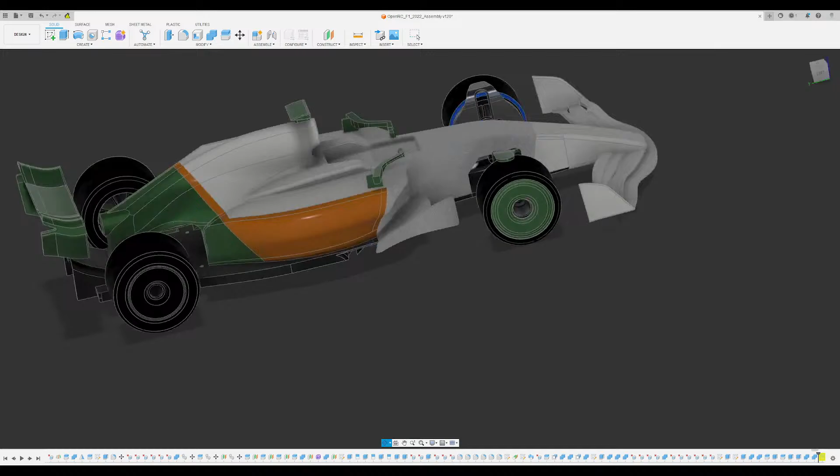And convert it, yeah. Okay, 1009 is junk, so I can remove that. 003 and 004. Let's add a little chamfer so that this isn't as chunky. 0.175, what's that? Thickness, 0.15, yeah.

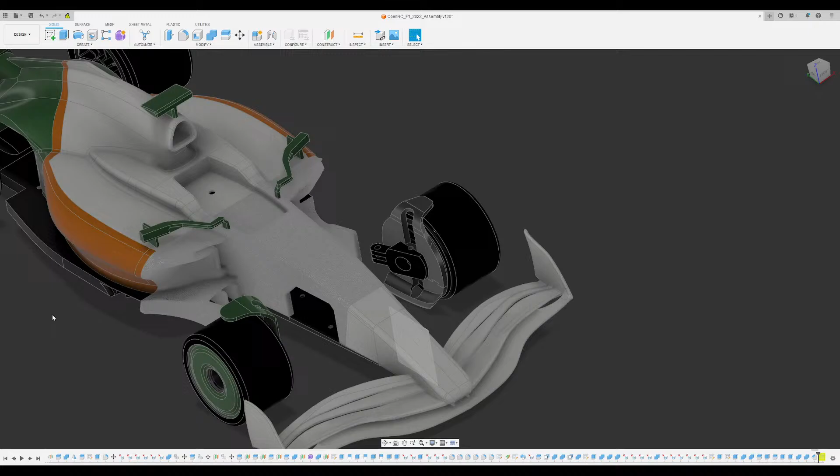That's a good enough approximation, I think. So when this prints, it's going to print like this, it's going to be like this little curve. All right, now let's bring back the OG mirror plane. Set, just... So just looking through the planes right now, it might be a little hard to see.

So yeah, okay, so drop this there. On second thought, I'm not so comfortable with this being so close. So all I have to do, but the nice thing is all I have to do is alter this a bit. Although what the downstream effects will have, I'm not so sure about. Let's give it some time to compute.

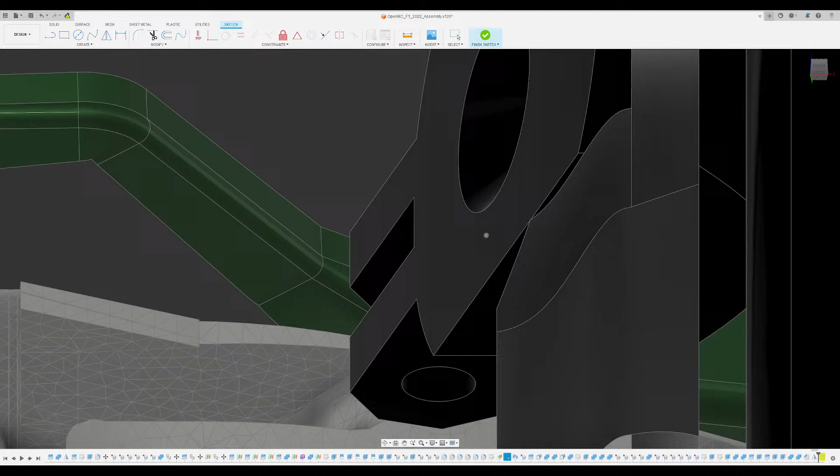How does it look from the front view? Better, still a little... I don't think I'm 100% comfortable with this yet. Because the problem is that in the real world, any sort of flex of this tire is going to cause this to contact the ground, and that's a lot of unnecessary friction.

So let's go back here. Oh no, wait, wrong sketch. And so where's the actual sketch I'm looking for? Yeah, there it is.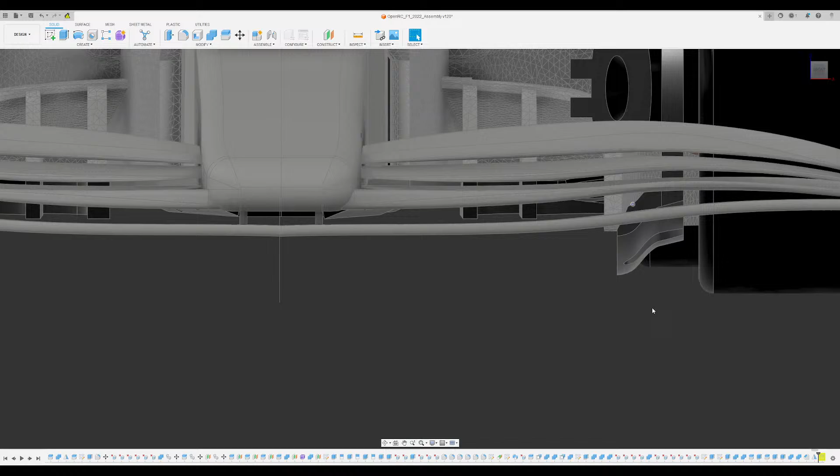So modifying the geometry a little bit. Yeah, I think that's okay. Still a little iffy about it. It's definitely better than before.

So yeah, but I'm really lacking the sort of flow that we have here. So go back to before the mirror step and clean up the rear corner a bit. This thing is, let's fillet this out. Fillet 1 should clear up that gap there. Fillet 2 should smoothen out this gap in this dimension.

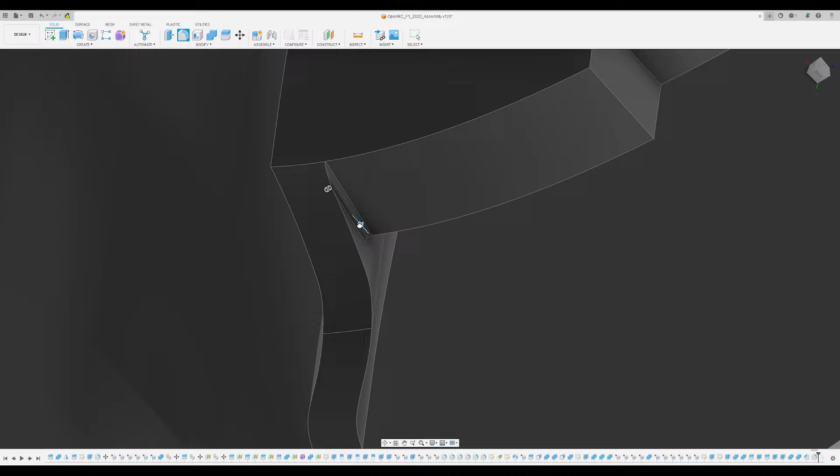Actually creates half decent. It's not really outwashing, it's more isolating. Yeah, oh well. Cancel that. So what works better here, a fillet or a chamfer? I feel like chamfer is the way to go because there's a hard transition here.

These are two separate parts. And then I can fillet this to make it look a little smoother. It also avoids any sharp edges. That is a sharp edge though. What if I just leave it alone? I mean, it's a tiny feature. I think I'm fine.

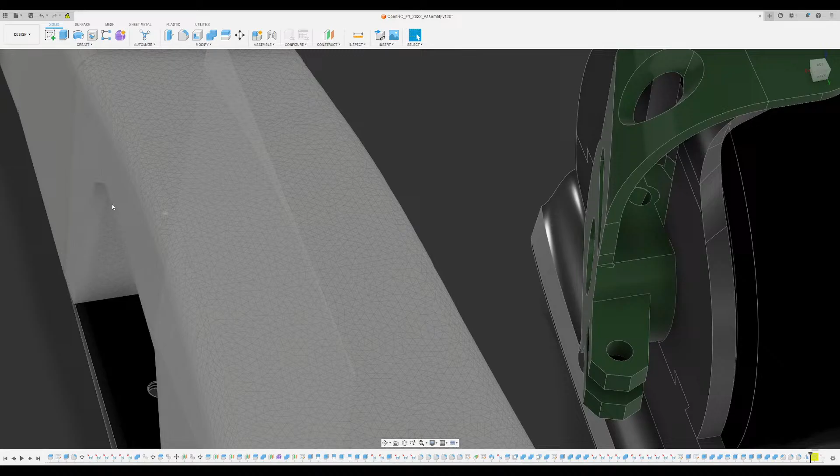Oh right, of course, this has to be adjusted somewhat. So this is the second generation. Now we have the third generation wheelbrows.

The right bottom brow, left top - no wait, got the sides wrong. God damn it, top one. All these to wheelbrow 3 now.

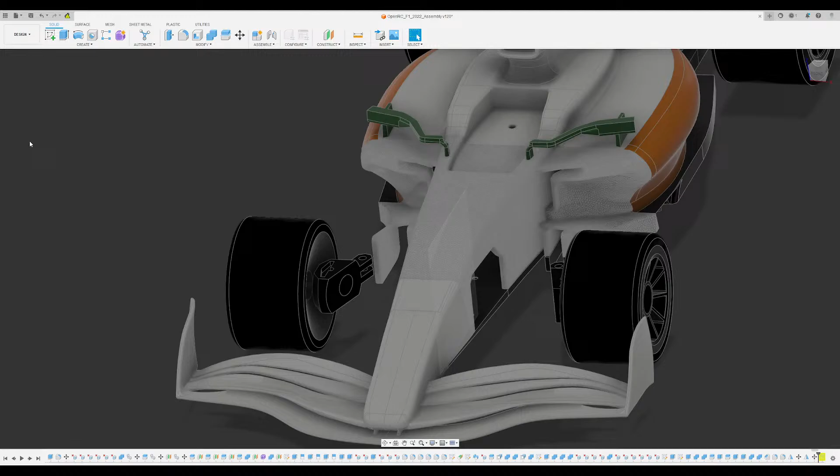So yeah, so just being one part, it's 3. Not ideal. Oh well. Yeah, I mean, it looks great. It's not perfect, but it looks a whole lot better than the second generation wheelbrow. And yeah, so wheelbrow 3. So the original wheelbrows, I think, worked with. Okay.

So if you look at wheelbrow 2, this is what it was. This is wheelbrow 3. A lot more elegantly designed. But again, yeah, the penalty is that you have to print 3 different parts instead of just one. That's just an annoyance. These parts are not on the same plane unless you're using something like a resin or a fuse sintering printer, SLA printer. If you're using FDM, you're kind of shit out of luck. Unless your supports are, yeah, FDM even with soluble supports might work.

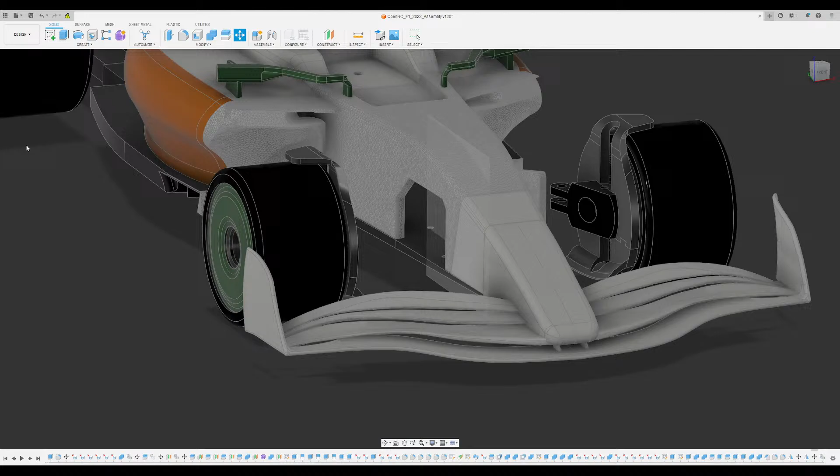So on that note, let's duplicate this group. So Control C V. Can I do that? Yeah, awesome. Fusion's being weird. Hold on, let me save this before it dies. Wheelbrows. So version 121.

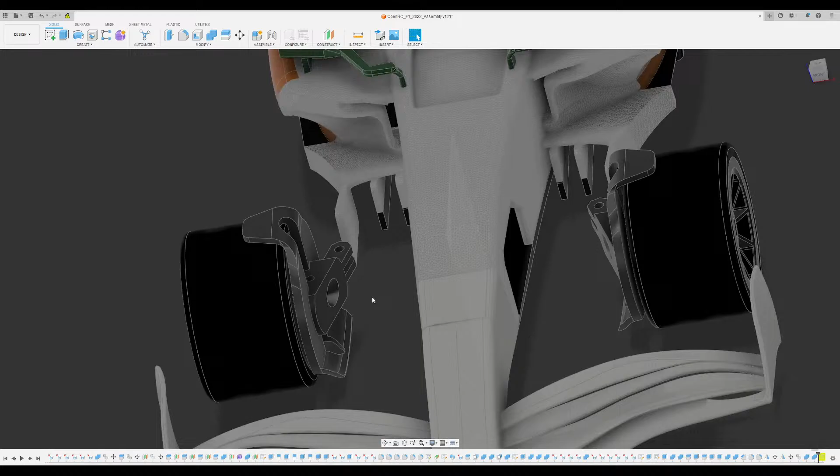Underscore fused. So wheelbrow 3 fused. I think you can combine left top, left bottom, and this. Left, and then these 3 are combined into one. So yeah, these are the fused wheelbrows for if you want to do with supports or on SLS or resin, whatever. Something that can support these sorts of wacky ass geometries. I think this will work.

Let's clear up some of the... So for these, there are some clearances that I put in. Let's get rid of those. So for this, let's get wheels out the way. Yeah. Huh? There we go. Just trying to figure out the right order of faces. Yep.

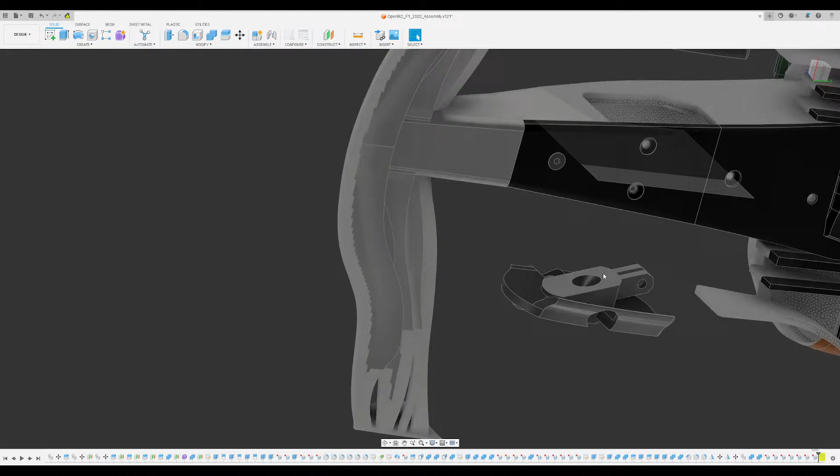So, what's this? Oh. Okay. Let's go. Delete, and freeze. Yeah, the fused one. This one's okay. No, the other one. Delete that. So another inconsistency. Delete that, and bingo. Delete that. Delete that. There we go.

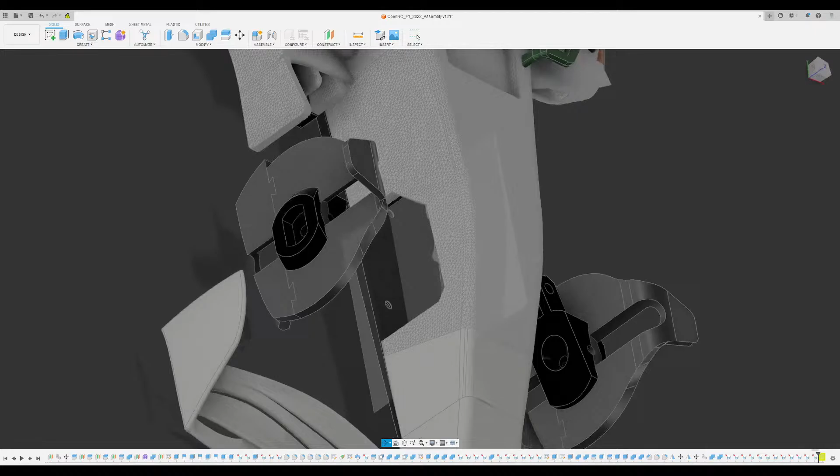So yeah, these are the fused wheelbrows. They're gonna be a lot harder to fabricate though. Okay. Yeah. So these are fused. If you want to do them supportless, this is the way. You print this with this face, this with this face, and then you print this with this face. The pro is you don't have to use support. The con is that you have to print 3 parts and then assemble them to get the wheelbrow, which sucks. I'm sorry. This is the best I could think of.

If you can afford it, you can do supported printing of the fused ones. Pick your poison, really. It's a pretty complex part to print. I'm aware that there's another design, by the way. That's kind of what inspired me to start redoing this design, because I noticed that there was a big discrepancy. And I tried printing that out. It's a fully fused design. It doesn't split it into parts.

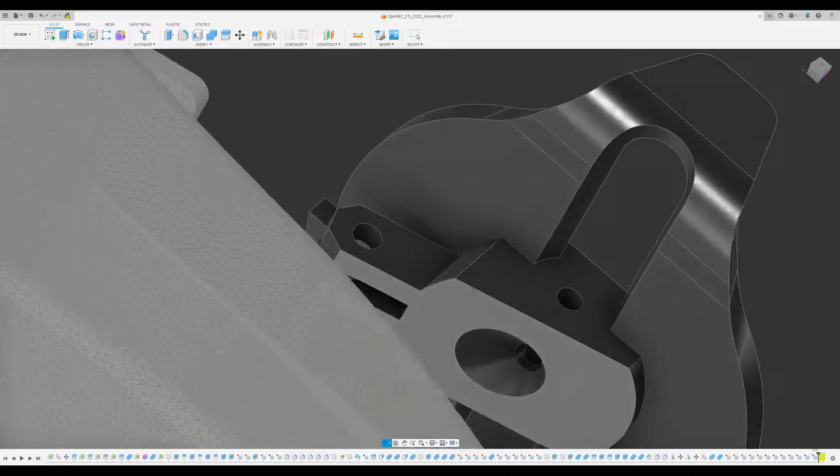The problem is that this attachment point is quite weak for what it's supposed to do, and that is hold the entire structural load. The way it prints is kind of awkward, so it really weakens it. That's the reason why I decided to do a split design as well. That's the other disadvantage of doing some supported prints. The orientation matters for each part when you 3D print with FDM. So it's the sucky part. But oh well.

Bring back chassis. Does it align? I believe it does. As a front axle assembly. So I can hide the front wheel assembly. I really want to hide one thing. I've already hidden the front wheel hub. Nice. So front wheel assembly. Yeah, I've hidden the wheel hubs. So yeah. So this is what it would look like fully assembled. Yeah, it should work. So yeah, bringing back the front wheels. All right.

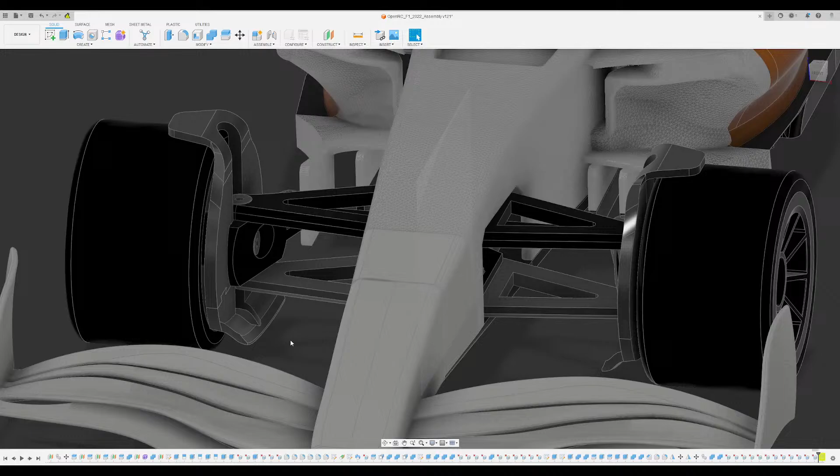That is wheelbrow design done, I'll say. I'm going to do a print test and confirm that these work. If there's any changes, I'll make them to improve printability, but I don't think there should be anything fundamental, it's just going to be like minor cosmetic details, I think, if any. Yeah, with that, I shall close the stream. If that prints, I think that's basically the whole thing complete. I'll see if I can print it, get a prototype. If I get a prototype that rolls on its own, I'd consider that completion.